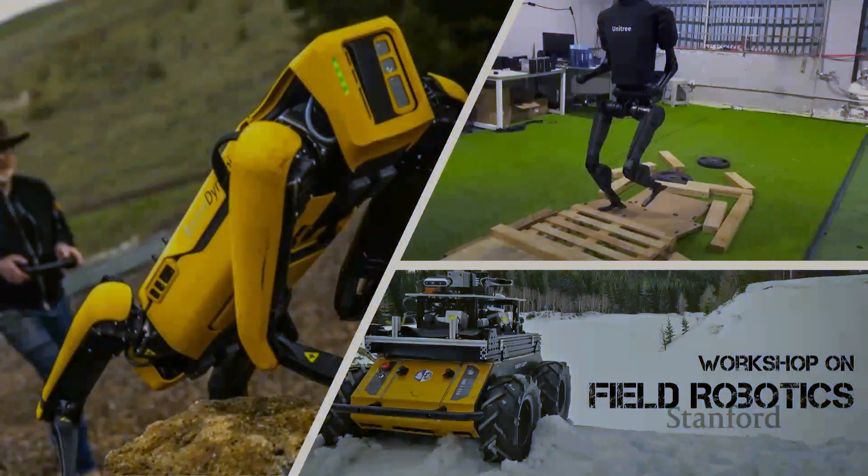But the journey for me since then has been, how do you bring this adaptability into robots so that they can work in real world environments and deal with real challenges and do useful things? And overall, I'm not the only one. Of course, there's a pretty large community that works on field robots. And when you think of field robots, you kind of think of these types of things, right? Legged robots, bipedal robots, driving robots. I've been a part of several workshops.

And I think it's pretty clear that field robots hold the key to a lot of problems facing sustainability, right? So obviously electric rideshare, that's pretty much on the way here. Climate smart construction, sustainable agriculture, which I'll talk about, and I'll talk a little bit about sustainable solar.

But I purposefully picked these pictures because you see there's like these humanoid robots trying to do things, right? So just as silly as it is to have a humanoid drive a car for your autonomous driving, I want to make the point that the robots that actually end up being successful and actually end up working may not look anything like the robots that most people think of, and really have to be a product or co-design of the hardware and the software together.

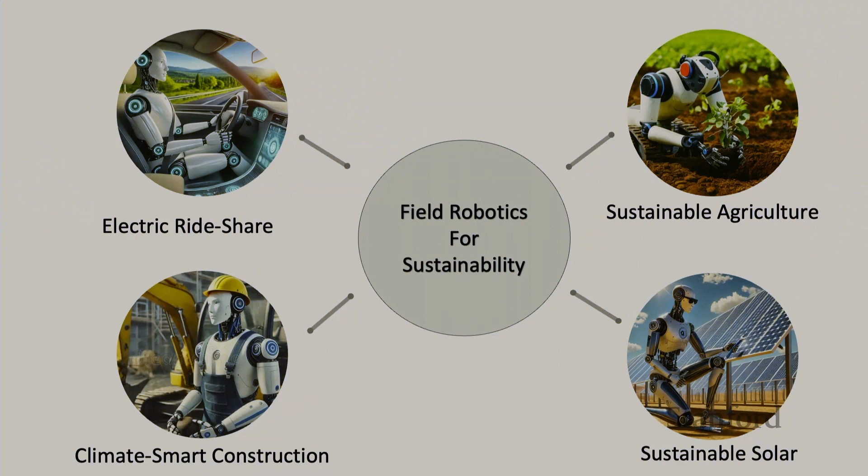A lot of this was actually inspired, when I was growing up as an academic or as a graduate student, by the work of Andrew Ng and the first aircraft that did the flips, and of course Sebastian, of whom I heard a lot about at MIT, because the team that competed against Stanford was MIT, which didn't win, right? But a lot of the effort that these early robotics engineers put in was towards co-designing hardware and software, so that we have reliable robots.

So here are my main points that I'm going to make through this talk. So where are the field robots? They're stuck in labs. How do we get them out of the labs? Well, we need to think about scaling up. We need to think about continuous learning and adaptation on the fly. We need to think about performance in the open world, not in structured environments, and common sense.

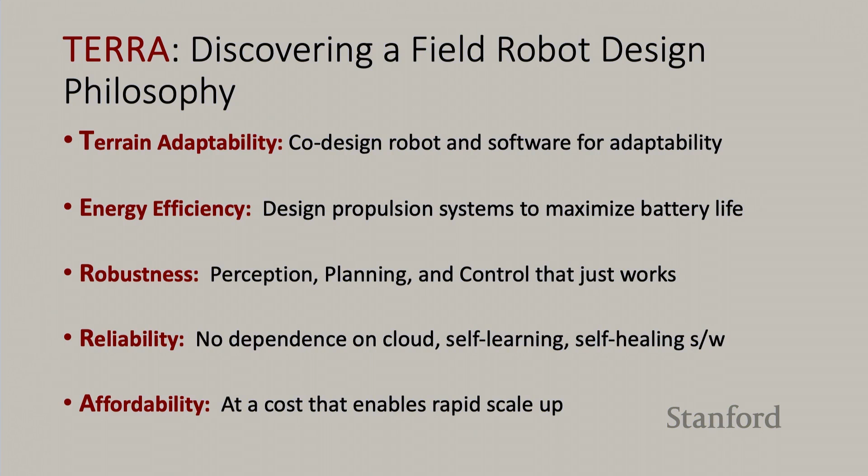So towards that, the journey to date has been discovering a philosophy, and I called this philosophy the Terra philosophy. The T stands for terrain adaptability or task adaptability, E for energy efficiency, R for robustness, reliability, and affordability. So what I'm going to do now is show you 4 or 5 examples of robots that we have created while we were discovering this philosophy, and describe to you the journey and the impacts that these robots are right now causing. So first we'll start with agriculture.

So agriculture, as you know, California is huge in agriculture, right? One of the largest agriculture producing states. The agriculture here is quite different than that in the Midwest. In the Midwest, we do a lot of corn and soybean agriculture. And the key tenet of the agricultural robotics work that I'm doing is that there's this labor bottleneck that's causing unsustainable practices to be used. And the idea is that robotics and AI will help alleviate those labor bottlenecks.

So this is an interesting paper by Foley that appeared in Science. And it talks about what is the cost of producing food today compared to the amount of food that we're growing. And you might have heard about how we're going to be 10 billion people in the next few years, and that's going to be a big problem. And in all honesty, we need to increase the amount of food that we're growing, but we also need to bring under control the cost of that.

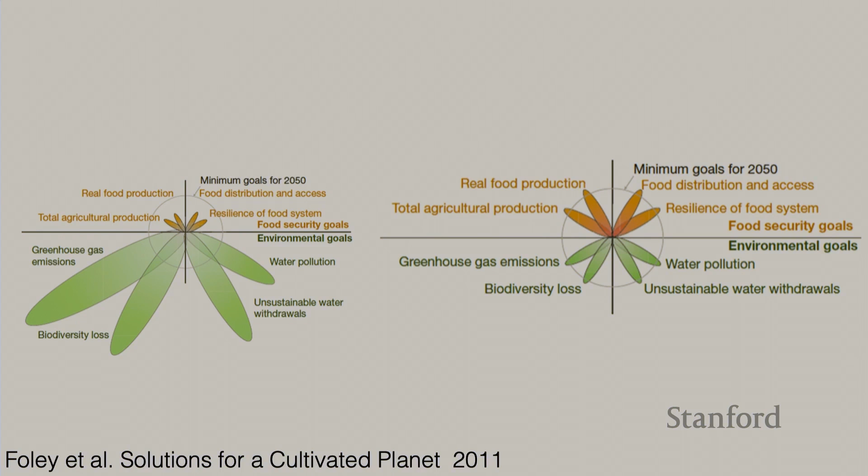And I'm talking about the environmental cost, right? So greenhouse gas emission, biodiversity loss, water pollution, water withdrawals. So this is called sustainable intensification. So how do we do this? One of the most unsustainable crops that's out there is corn. There's 200 million acres of it in all of the I states, and it's what we call a large-scale monoculture. So you take large swaths of land, you clear it of everything else, and just plant corn. And because you're moving the prairie away from its natural state of equilibrium, you have to put a lot of chemicals in to make that work, right?

So herbicides, fungicides, fertilizers. But the problem is that this system of large-scale monocultures is not only unsustainable, but it's failing. You might have heard of pesticide in your waters, right? But there's also a huge challenge with the herbicides that folks are using. The weeds are becoming herbicide resistant. And this is not anything mythical. You actually see it now.

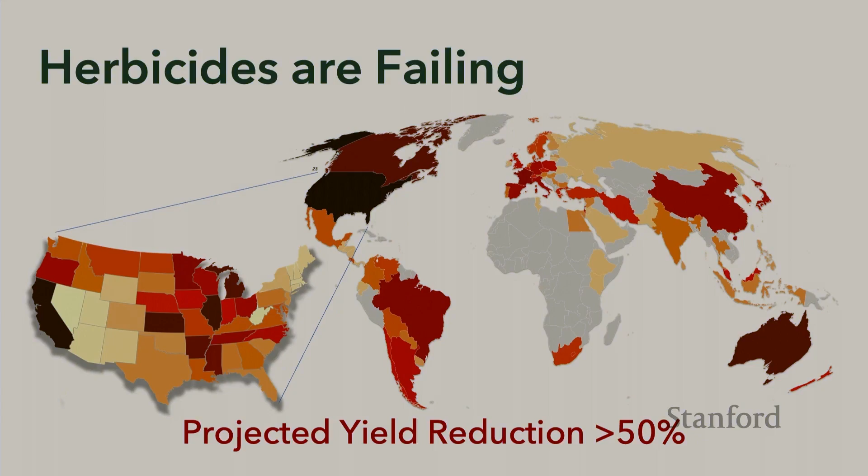If you drove down in Champaign a few years ago, we didn't have a lot of weeds visible. But now, close to the end of the season, you see these weeds popping up out of this soybean crop, to a level where sometimes it's impossible to harvest, right? So this, according to some people, is a real doomsday kind of situation. Then there's the large equipment that we use to enable these large farms. A normal farmer in the Midwest will have 2,500 acres of land under control.

It is not contiguous land. It is parcels of land that are distributed all over the place. And the only way they get anything done is by using these very large machines, right? But these machines cause soil compaction, they cause erosion, they cause nutrient loss.

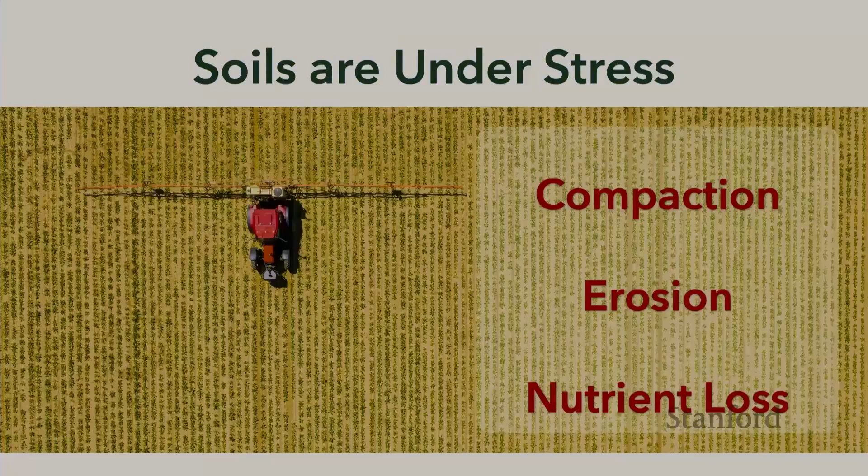And on the other side of the world, if you look at another very unsustainable crop, which I'll talk a little bit about, which is palm oil, crops like that cause significant deforestation and loss of biodiversity. And even with all of this, just with corn and soybean, the trends are that our yields are not actually matching the demand.

So one way to address this challenge is by adding new options for farmers, right? So today farmers can either use manual labor or use large tractors. Manual labor is great for small-scale farming. Large tractors are great for very large-scale monocultures. There's really nothing in between.

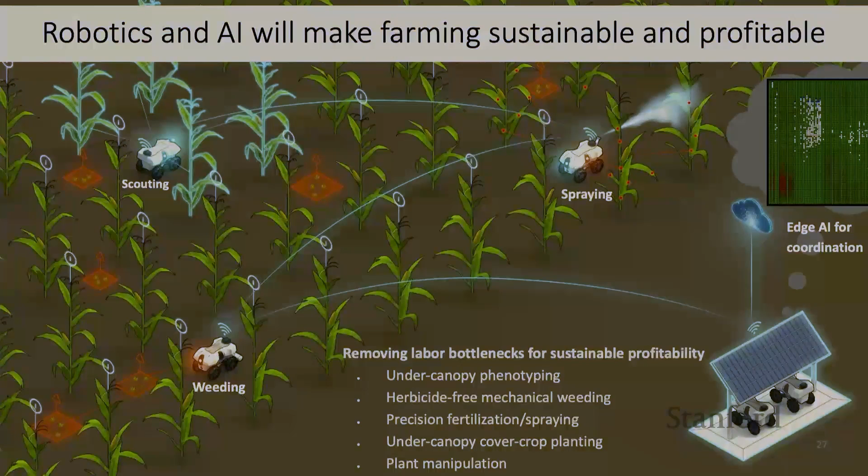So one of the ideas that we started thinking about 6-7 years ago was, can we use a number of small robots that can work together and do things that are today not possible due to unavailability of labor, such as phenotyping, mechanical weeding, cover cropping. And I'll talk a little bit about some of these things.

And this idea of robots in agriculture is not very new, right? I mean, people have been talking about this for at least 10-15 years, but it's very challenging. And even though there's a number of companies out there that are trying to do it, the problems are really hard because the scales are very large, the field is very messy, and whatever data there is not really representative of what actually happens in the environment.

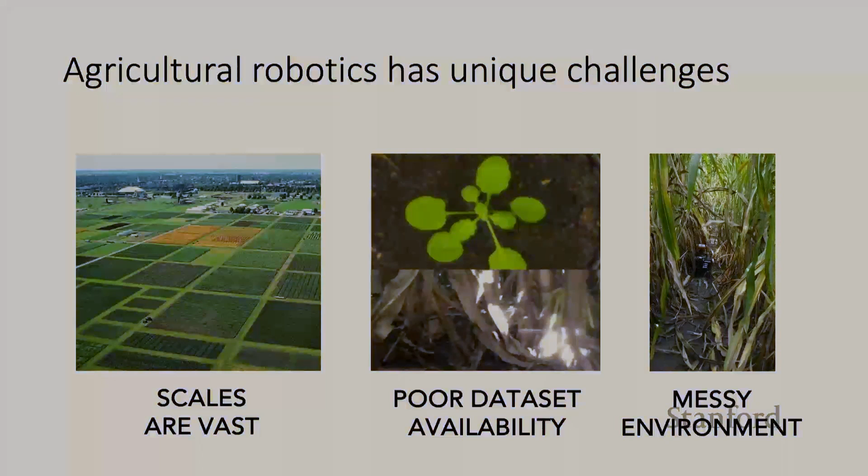So where are the ag robots? So even though you see a number of these companies coming up and robots coming up, we haven't really seen a large-scale adoption. And if you really kind of peel the onion, and there's a lot of interesting work on this, everything boils down to cost, right?

So we cannot use the same ways or same methods that we're using for autonomous driving, in which we're using a lot of sensors and over sensing the problem, mapping everything out. We have to find ways in which we can reduce the cost while also making the robots work.

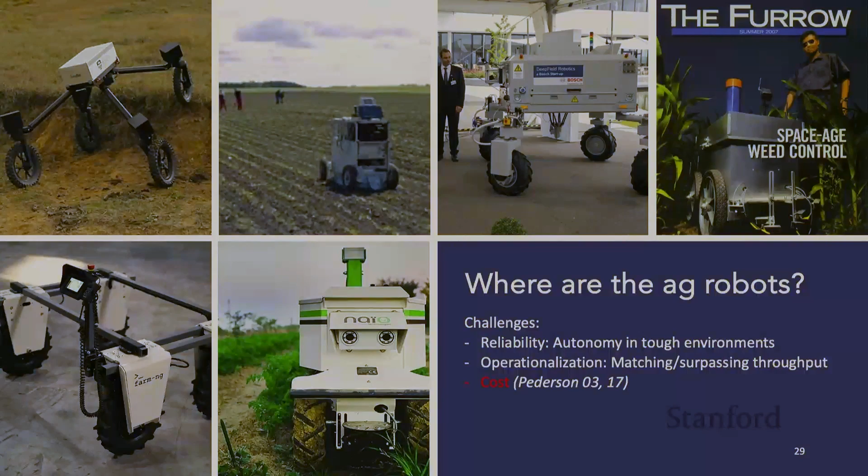So now I'll give you the first example of how we've been trying to do that. And this robot is called TerraSentia. And we have made about 80 of these, and I think you were involved in this robot. And these are actually deployed in the field.

So corn, right, which is everywhere in the Midwest, turns out it's actually not a natural crop, in the sense that if you go back through the history of agriculture, you won't find a natural ancestor of corn. What you find is this thing called teosinte, which looks nothing like corn. But the Native American people in South America selectively bred teosinte with other crops to create corn. And there's a very interesting article on this in the New York Times.

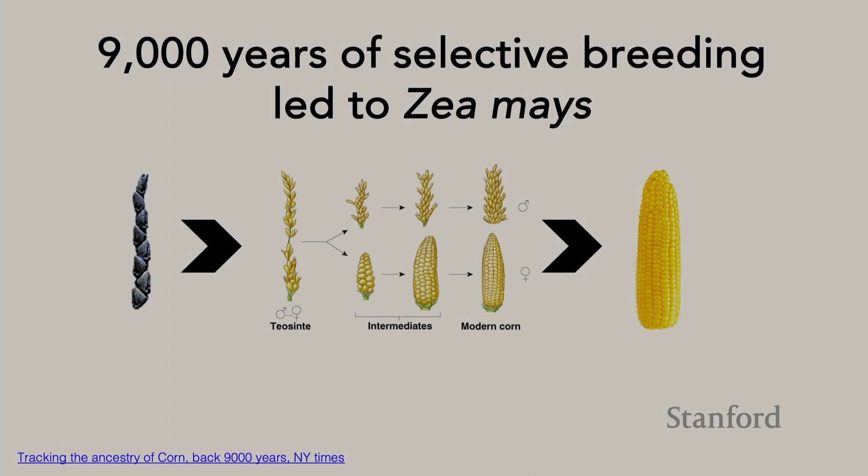And it turns out that only about 9,000 years ago, the latest varieties of corn were created. And right now, even under the North Pole, the modern varieties of corn are stored. So in case we get hit by a meteorite, we don't have to go 9,000 years back, right? But of course, that pace of breeding cannot keep up with what's happening today.

So the only way you can make a single farmer deal with 2,500 acres is to create seeds that are super adapted to the environment, right? So in India, this is a joke that I used to make. Like in India, if a bug eats a plant, right, the plant dies. But in the Midwest, if a bug tries to eat a properly bred corn plant, the bug will die, right? So that's the idea. But the pace is just not matching up. So in order to feed the world, we really need to accelerate this pace.

So to do this, modern crop scientists use a technique called genome-wide association, with other techniques. And what happens there is that you sequence all the genomes, and you measure the environment, and you're looking for the patterns in the genomics that represent specific phenotypes.

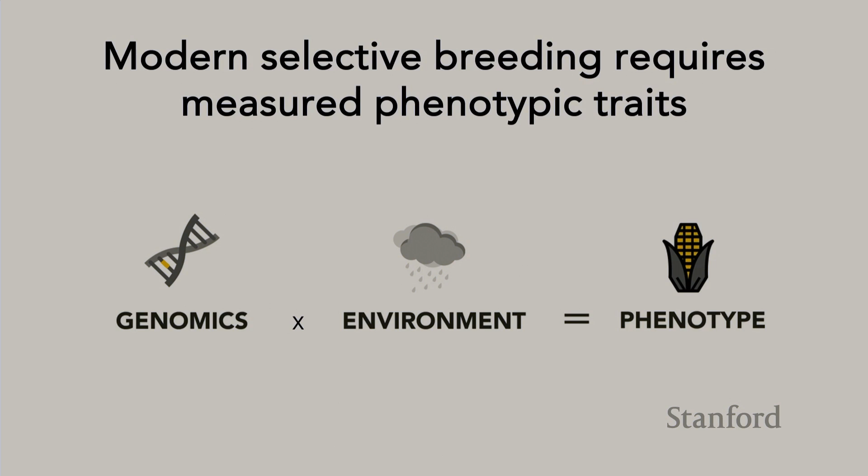For example, disease resistance, yield, right? And once you find them, then your job is to use techniques like CRISPR to create the crop that accelerates those traits. But we don't have a model. We don't have a simulation of plants. So the only way you can do that is by running very large-scale trials. So what these companies do is they run hundreds of thousands of acres of trials.

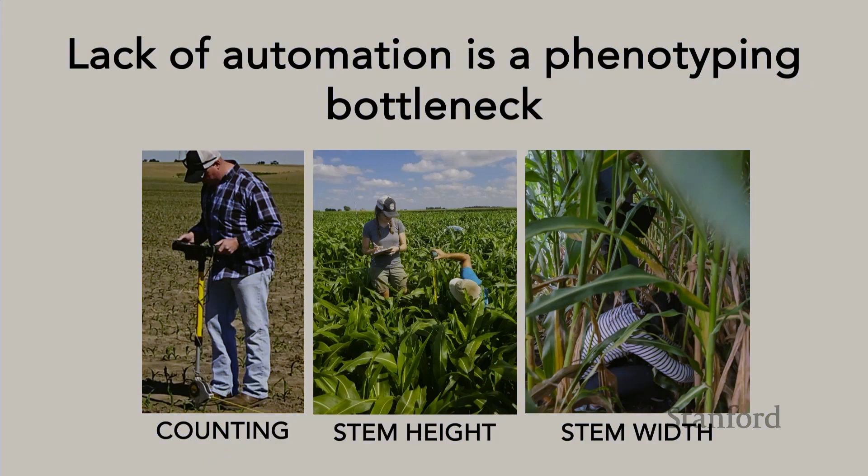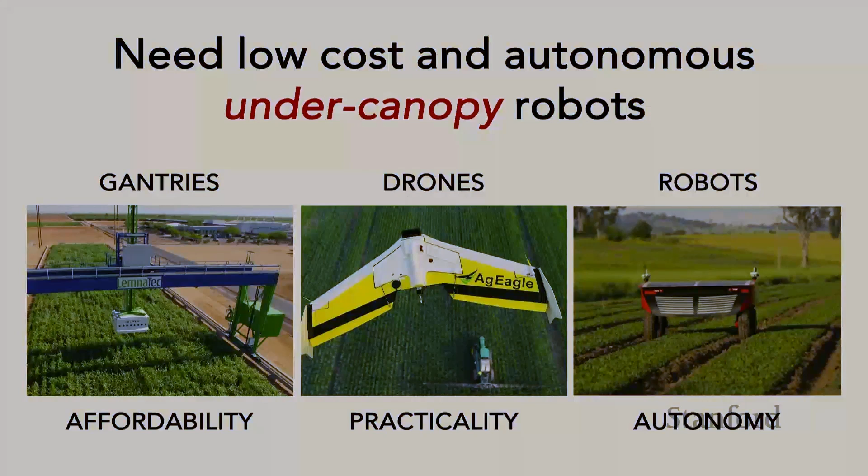And today, all of those measurements are manual. And this results in what we call the phenotyping bottleneck, right? So these folks are counting, measuring stem height, stem width. These are really difficult things to measure and take forever. So you can automate that using gantries or drones, but neither of those see under the canopy, which is where robots come in, but most robots are over the canopy.

So in 2017, we introduced this 3D printed robot called TerraSentia, which won the Best Paper Award at the Robotics Science and Systems conference. And the idea was really this small robot that can go under the canopy and use machine learning techniques to basically do simple phenotyping. In this case, it was counting.

And the genesis of that robot was that before we started working on it, these were the kinds of robots that were out there. So this is a robot that was made before I came to UIUC. It's a tracked robot, and people are using all these kind of best practices. So people thought, well, you have to make a tracked robot because it's the field. But you see here, this robot kind of drags that plant down.

You have to put a mast on it because you want to see down, and you have to put the most expensive sensor that you can find on it. But the reality was that while that was an expensive and interesting robot, it actually didn't do the job that it was supposed to do. So, as we learned from the world of drones, miniaturizing a helicopter was not the solution. We had to come up with a drone, which is not something that a human would fly in, right? Because it's impossible to fly until you put an IMU on it.

So a student of mine then came up with this idea: why are we trying to do all of this? Why don't we just take our drone and make it run on the ground? Well, obviously you cannot fly it through there because the endurance just wouldn't be there. So we came up with this 3D printed robot, and it was just a very basic idea of taking those motors and flipping them down, each wheel having its own motor, with no other moving part, and then putting a camera on there to see how well that works.

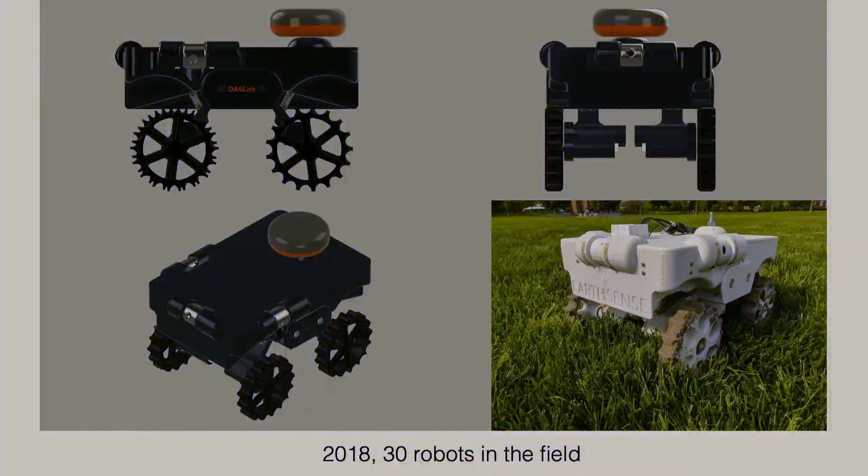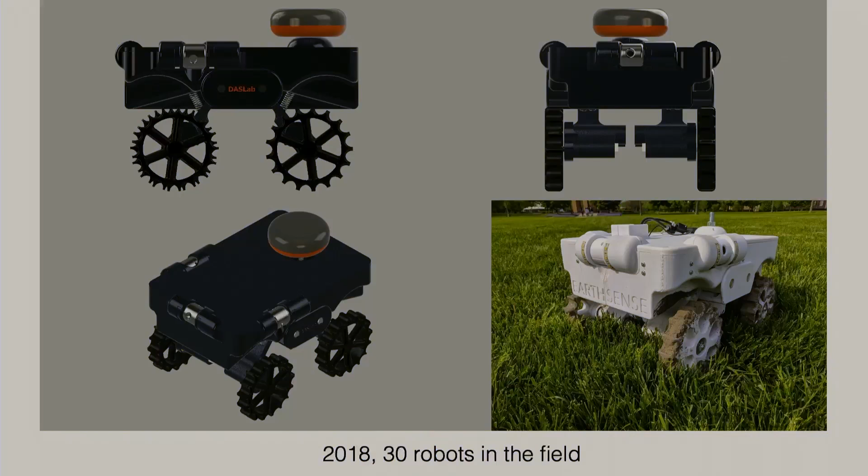Who knows Steve Blank? Anyone know Steve Blank? Lean startup, right? Stanford person who created this whole philosophy of lean startup. So we had an NSF I-Corps project, and we went and engaged with customers. We made 30 of these 3D printed robots and gave them to customers. And we said, okay, go use them in the field, we'll see how well that works. And literally some of them melted in the field, because field environments are very difficult.

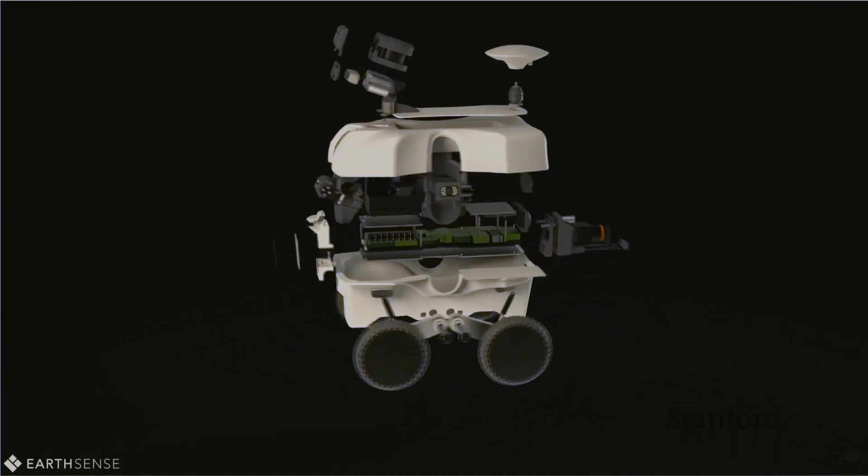So at around the same time, this company EarthSense that I co-founded took over that project and became a technology partner in the ARPA-E TERRA-MEPP project, and created this robot called TerraSentia, in which Rajan was a part of creating the drivetrain, right? So this was a very different field robot compared to the ones that were out there. It was made with hub motors, so each wheel was itself a motor. There were no connections other than that, so you directly connected your arm to the wheels.

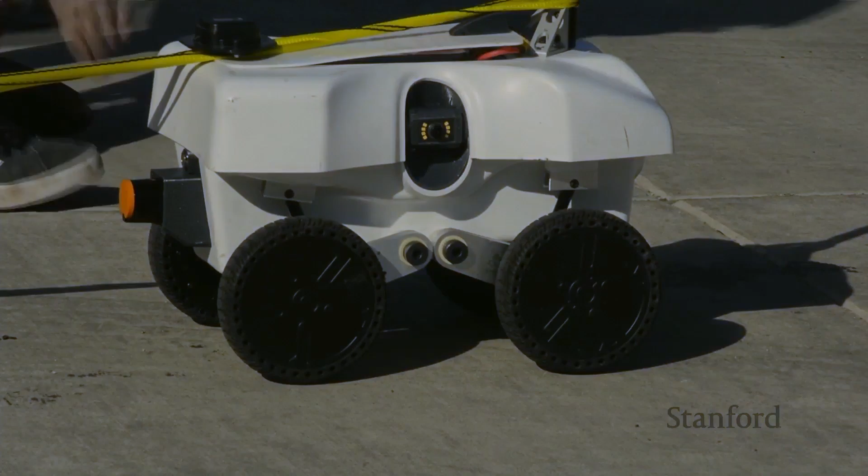Because they're hub motors, they're contactless, brushless hub motors. They can go through water, they can go through snow, they can go through all kinds of different terrain, and the robot was extremely tough, as is shown in this example. So this was, I think, the 2020 or 2021 version of that robot.

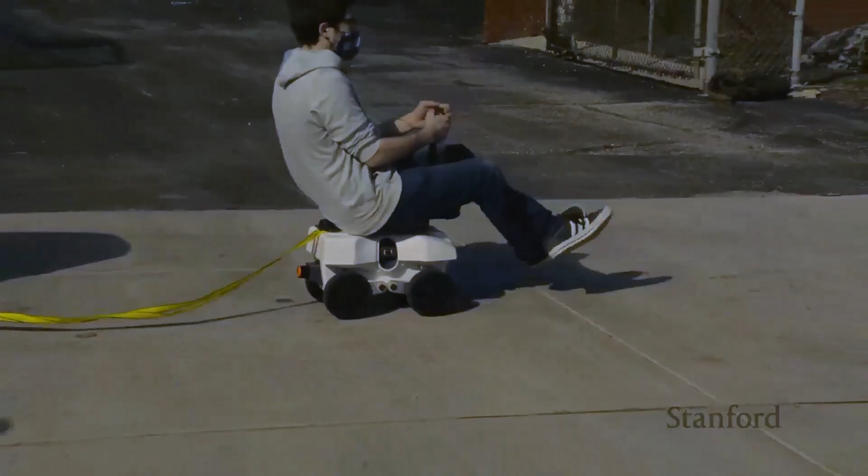We iterated across 3 years, and every year we tried to improve the robot, finally bringing it to this level of maturity. So this is one of our engineers just loading up the robot with some weight. The robot itself weighs no more than 20 kilos, right? Then he's sitting on it, and then the robot pulls this 400 series tractor, right?

So I think it was very interesting, getting into the design space there and figuring out how we can use electric propulsion to make sure that we pack a lot of power in very tiny machines. So that's great. That was one part. The other part was trying to get these robots to be autonomous. The standard way of doing that is with global positioning system, GPS, right? And it works great on John Deere AutoTrac and Trimble's GPS systems because they have clear view of the sky.

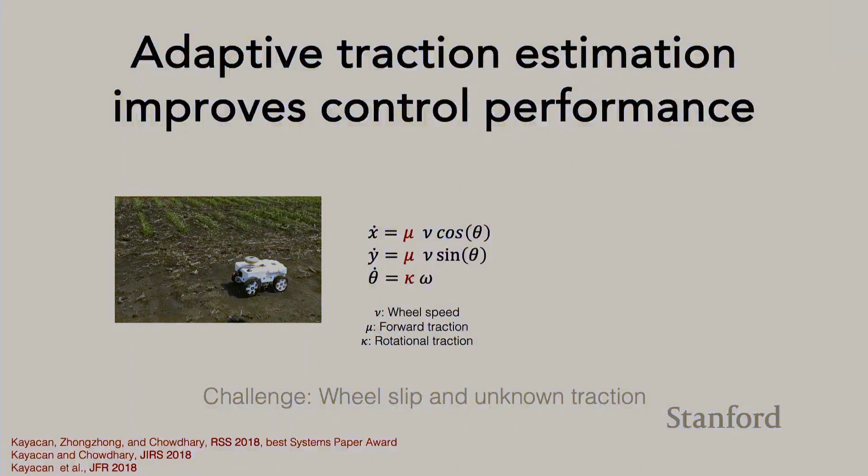But once you start going under the canopy, and we did a lot of work on this, part of a number of papers that one of my students wrote, who's now at University of Oklahoma as a professor, was figuring out these traction coefficients in real time and using them to improve the control, using techniques like model predictive control and receding horizon estimators to really improve the accuracy of GPS. But the problem is, once you go under the plant canopy, whereas with a real-time kinematic RTK GPS you're supposed to get under 2 centimeters accuracy, the accuracy drops to 40 centimeters, right? Because the signals bounce off of the plants.

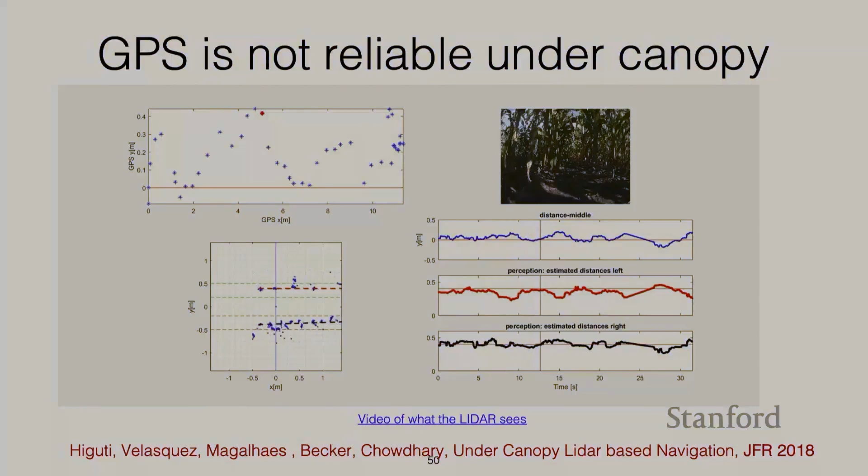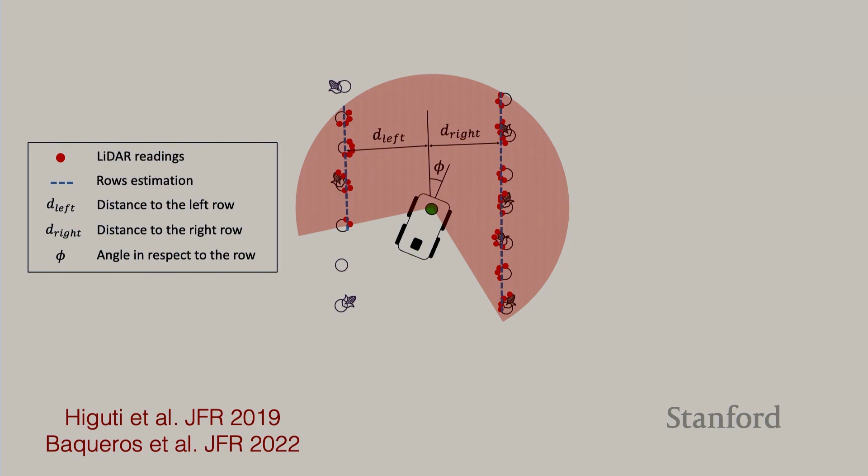So we started in about 2019 working on how do we solve this problem using exteroception, right? And we posed this problem as a row following behavior problem. So using a single sensor, can we figure out the distance to the row and the angle to the row? And this is, in a setting like here, a LiDAR point cloud. So the LiDAR is here. Again, we're trying to reduce the cost of the LiDAR, so it's a $1,000 LiDAR. And these are all the plants here. So you see it's a completely messy point cloud. Whereas if you try to drive here, you'll get a very nice line on which you can fit a line.

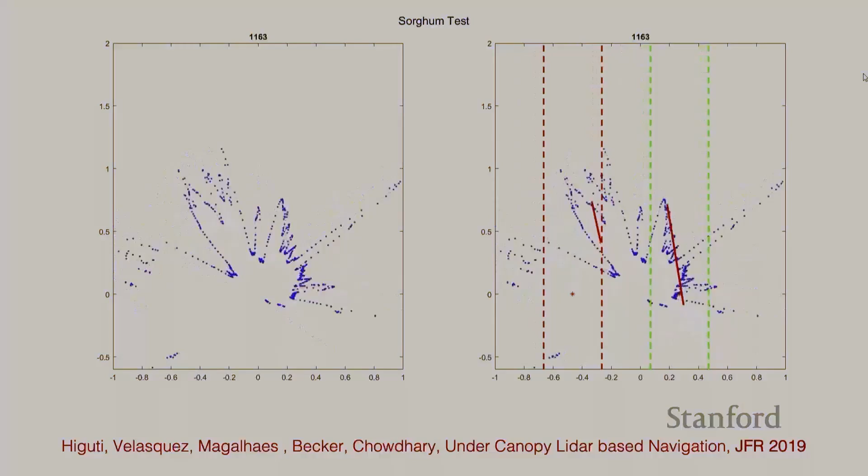So fitting the lines on that LiDAR point cloud was one of the first key challenges that we had to solve. That's explained in this paper here, and we came up with a method that was basically an accelerated form of line fitting in the presence of outliers, and then we put it onto the robots. So this is an example of me giving that robot a hard time as it's driving down the field with this algorithm on it.

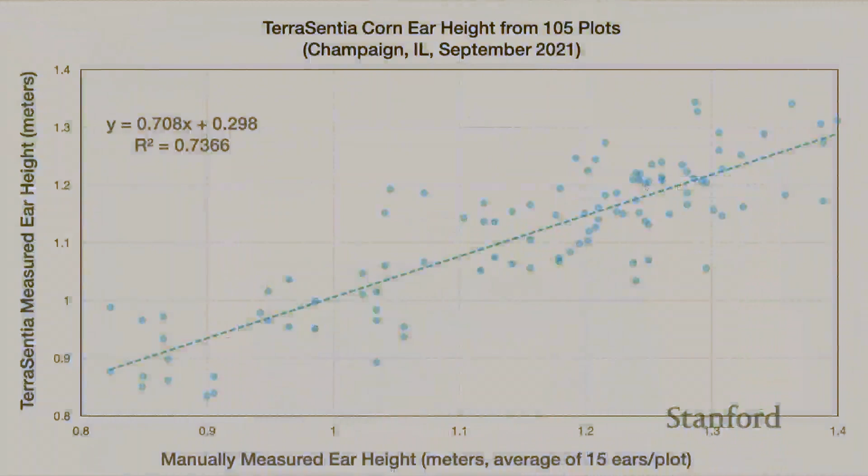So taking that same idea, this is just measuring, and it is limited to crop breeding. We wanted to bring that idea to farmers. So in the Midwest, the agriculture is very seasonal, right? Right now, when I left Chicago, the temperature was 18 degrees Fahrenheit, right? So it's freezing, and there's basically nothing that lives. So from basically November all the way into March, we leave these 200 million acres entirely bare, right?

And then before planting happens in around June or late May, weeds come up and the soil degenerates and all kinds of things happen, right? But there's a way, and this soil could be doing useful things, right? So you can grow cover crops on it, and cover crops can do a number of things. They can sequester carbon, they can fix nitrogen, they can hold nitrogen that's excess, and they can break up compaction, right? So different types of cover crops can do different things.

Now there's also cover crops that can be used for harvesting, like they can create biomass that can be used to create sustainable aviation fuel, for example. But most farmers are not able to do it. So this is around Thanksgiving. If you try to land in Champaign, you see what I call the corn and soybean desert, right? It's just like acres and acres of bare land.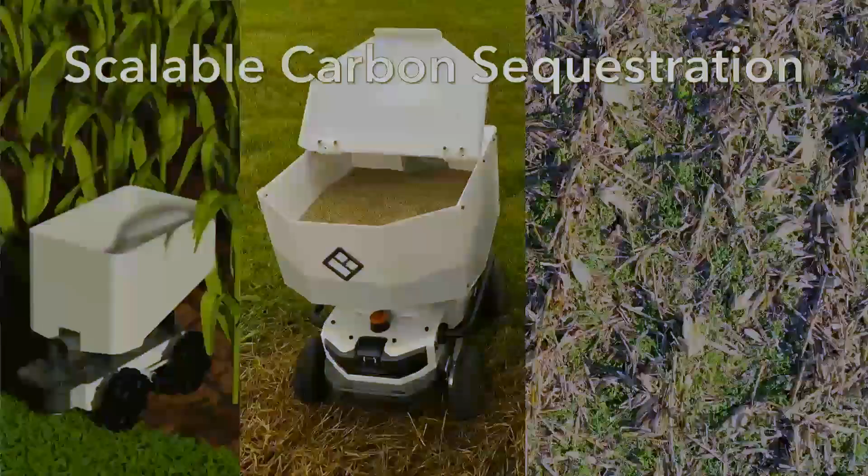And the problem is that they harvest somewhere around September. And if they try to get cover crops planted after that, the sunlight days are really not there, right? So by November, it starts to get cold, and they can't really do this. So we had this idea, well, what if we created a robot that could go through the canopy and broadcast seeds? So using the same kind of technology that we were using, but broadcast seeds so we can have cover crop planting done as early as August in standing corn.

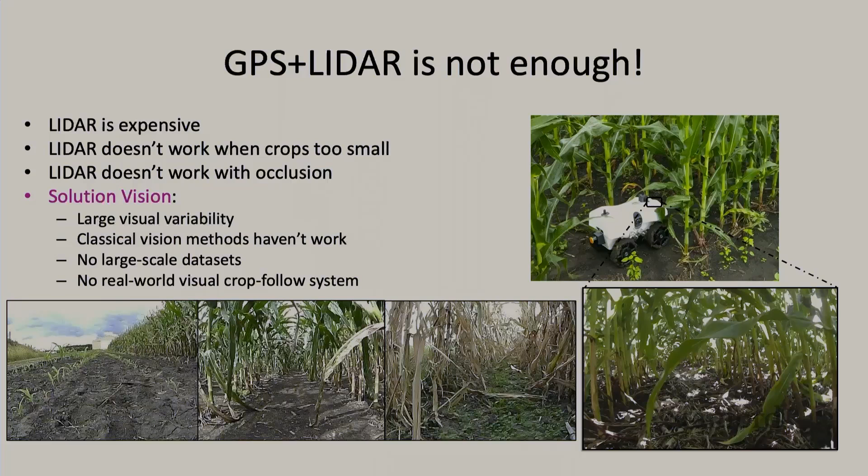And with a lot of economic analysis, we can show that it can be done at a much lower cost. But the problem is you need to bring the cost of the robot further down, right? And you need to make it more reliable. So LiDAR-based autonomy is just not enough. So we had to change the sensors and think about using cameras. So these cameras cost $30, whereas the LiDARs cost like about $1,000. But that's a very challenging problem, right? Because fields are really messy when you try to do it with monocular vision.

So we worked together to create a method called CropFollow, and Arun, who is about to graduate, worked on this. And here the idea was, we thought about many different ways of doing it. One way you could do it is using techniques like reinforcement learning, right? Where you basically learn everything from scratch and try to see how that whole setup works. But the problem with that is it's really difficult to debug. And then in this high mix, low volume manufacturing setup, these robots are individually very different. And because of that, it becomes very, very hard to find where the issues are. And of course, we had a fully working system also.

So what we did is that we just swapped this distance and angle estimation with vision. And we said, can we find distance to the row and angle to the row with a single vision? So basically, you have a single camera, a monocular camera, an image from the camera goes in, it goes through a neural network, and it predicts the distance to the row and the angle with respect to the row. And so we started doing this in about 2019.

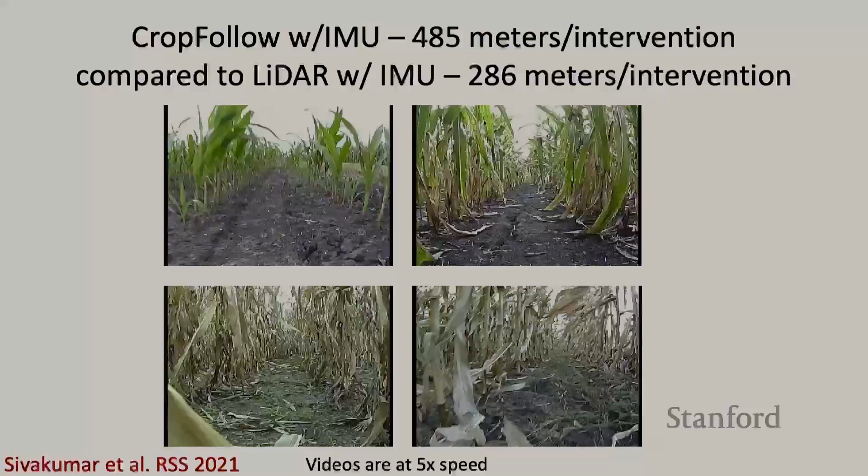And back then we did it with labeling, like heavily supervised learning. So we labeled about 26,000 images, using all kinds of techniques where you can correct the image when you don't see the horizon. We use the plant as the way of seeing the horizon, measure the roll and pitch, and then get basically a good estimate of where the crossing points are. And then we used that to train this model, and then we started testing it in the real world, and it worked really well.

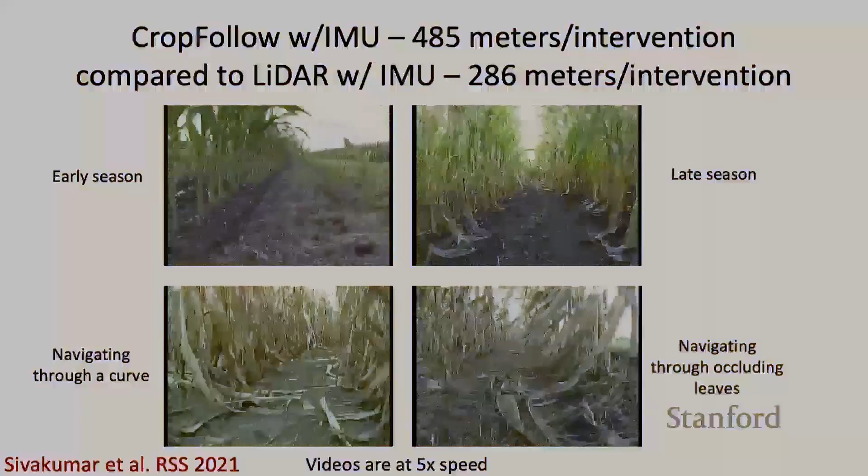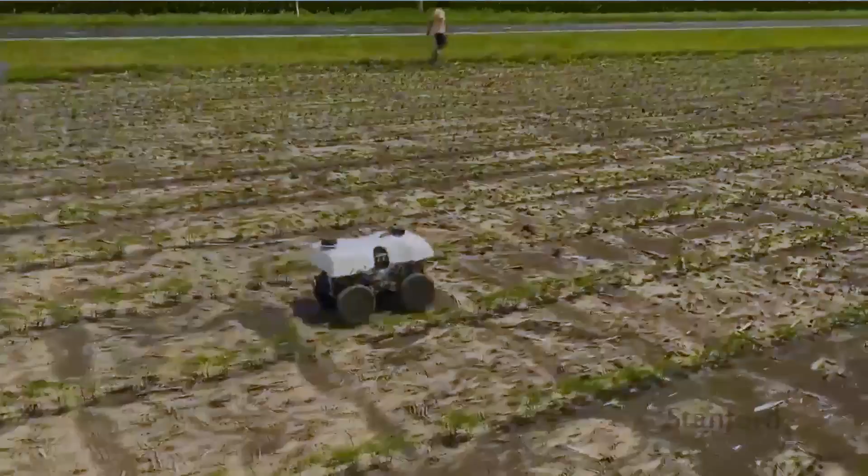So these are some examples of this vision-based autonomy. You can see the terrain is really challenging, and the robot is able to tolerate early season, late season, a small curve, and significant occlusions. And so we deployed this, and this is now Arun, and you can tell that he's ready to graduate because he's starting to kick his robot now. He's a lot gentler, although there's a number of other things that were also changed.

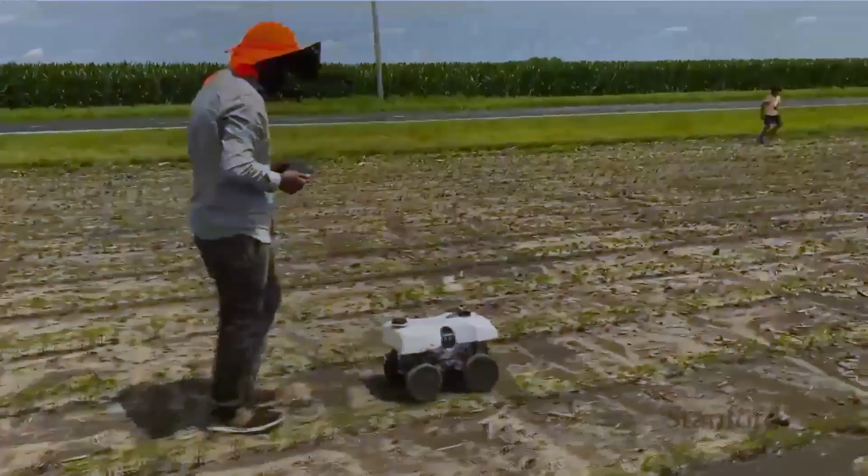As you can see, the robot's also controlling its speed now. So there's a little planning module on there which is trying to control the speed as well as the angle of the robot to make sure that it's going on its path. And I think this is like, can you see the plants? This is early season soybean. So obviously the LiDAR isn't working because the plants are not as tall as the LiDAR. And then after a while, the robot will enter early season corn.

The same, just going straight. This is at the Farm of the Future at Illinois. So anyway, let me see. Just push it forward a bit. Yeah, so it just seamlessly transitions into early season corn and continues to go.

So this was great, and then we took this and several other methods and tried to do a large scale experiment with it, and then we started finding out that even though everything worked great in the paper, and we were able to get very large sets of validations, and it was an RSS paper, 25 kilometers I think, when we started to deploy it beyond that, we started to see a lot of issues. So one of the issues was that the environment changes. There's really no uncertainty prediction.

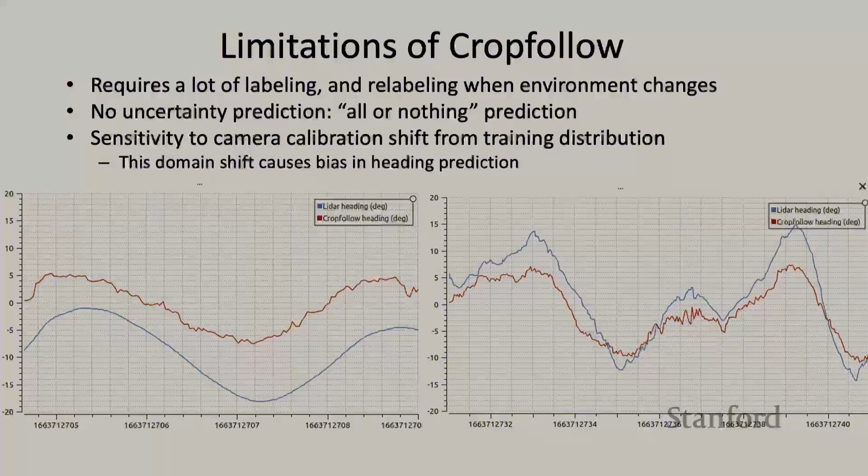So because the environment changes, we basically end up with a domain shift. And because the cameras on these robots are differently calibrated and installed with slight defects, what works on one robot doesn't work on the other. There's like little biases that creep up.

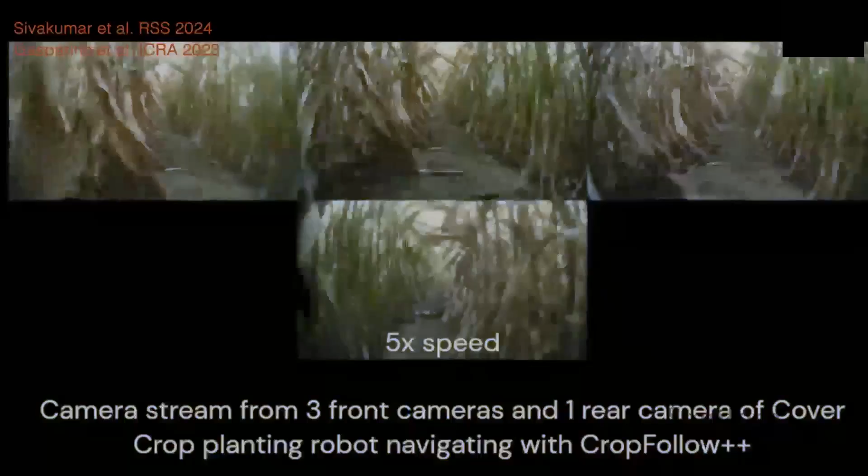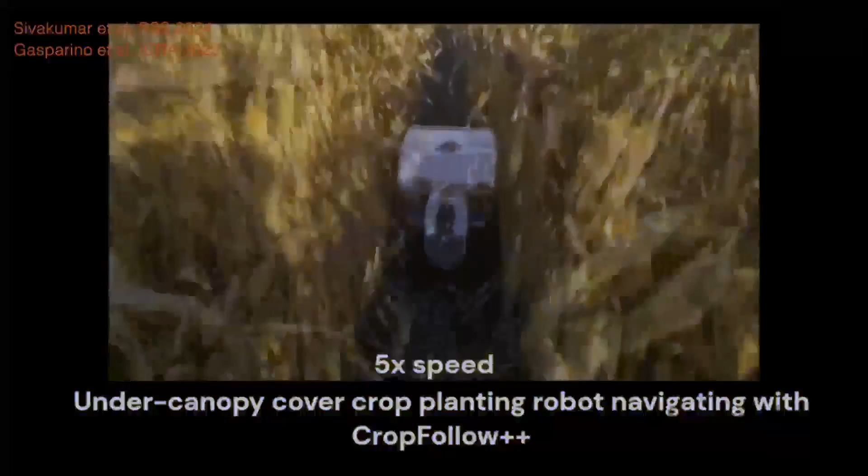So in this year, 2024, we published another paper called CropFollow++, in which now instead of doing the full angle to row, we're basically creating a confidence estimate of where the horizons are. So 3 points, right? The end of the horizon point, the 2 points here at the side, and then combine that with AI to detect failures and recover from failures when they happen. So this is an example of that happening.

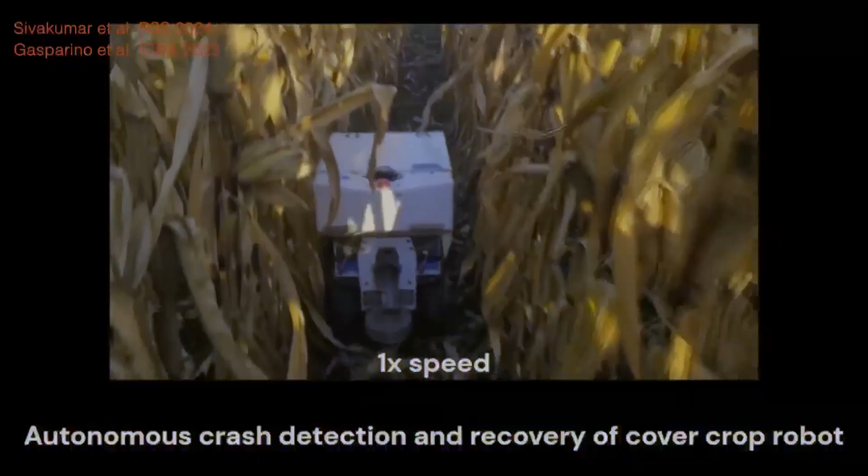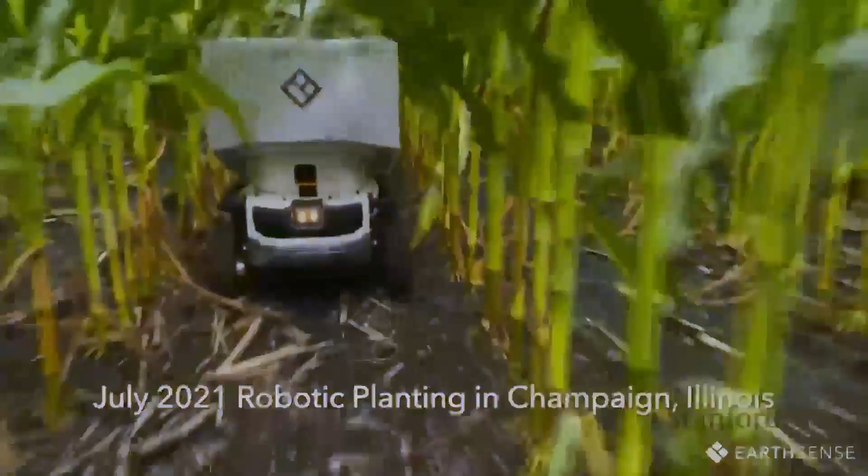So there were two sets of papers. One was the 2024 RSS, and the other was the ICRA 2023 paper, which kind of put that together. And that is working really well now, and that's what creates this kind of an idea. So you have a robot which can go through standing rows of corn and distribute seeds of cover crop. And there's new types of distribution methods that are now coming out.

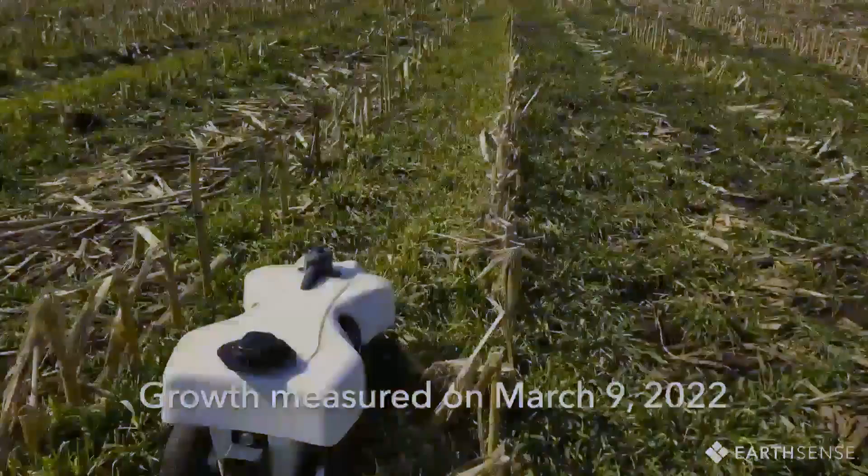Each robot can cover 9 rows. So 4 rows on one side and 4 rows on the other side and the row that it's in. So if you have 10 robots, you can cover 90 rows at the same time, right? So driving at about a meter per second, these robots can get a whole field the size of 100 acres planted in less than 5 hours. So that starts to now compete.

And by the time you harvest, there's already a standing cover crop there. So this is a very iconic picture, right? The harvester has just gone through and the cover crop has already emerged. At the Farm of the Future, we did an experiment comparing robots versus tractors. And you can see by spring, the cover crop that's planted with robots is really robust and healthy, and we get really nice benefits from these types of crops.

We have a large grant now to try and scale this up with a target of many thousands of acres next year, and trying to really bring this technology to fruition.

Now I'll talk about another example of the Terra philosophy with a robot called TerraMax. And this is now all the way on the other side of the world in Malaysia, in palm oil plantations. So palm oil is one of the most consumed oils. Apparently 50% of supermarket products have palm oil, less so nowadays because of all kinds of issues in the US. But if you go to Asia, even Cadbury's chocolate has palm oil. And in my opinion, it tastes better.

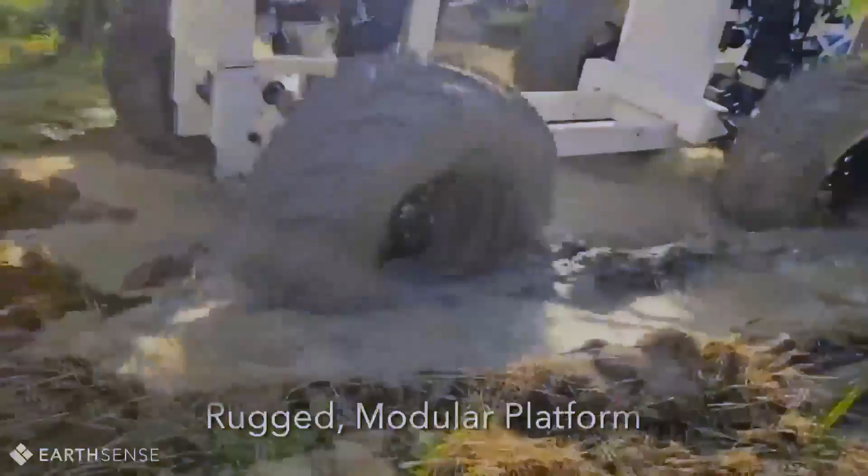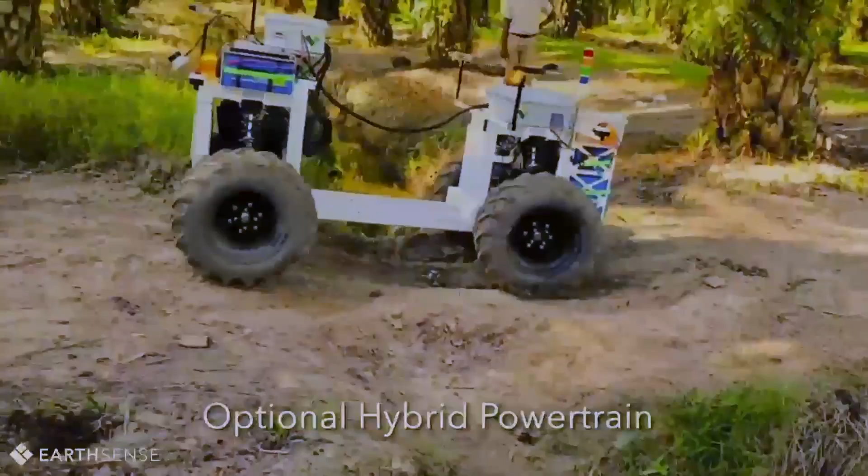Now, TerraMax is a completely different robot. It's a 500 kilo robot that's much larger than our other robots. It still uses the same types of techniques, so individual wheel motors, no variable transmission shaft, so there's no transmission. So the two wheels can operate completely independent of each other, right? They each have their own suspension. It can tackle really challenging terrain,

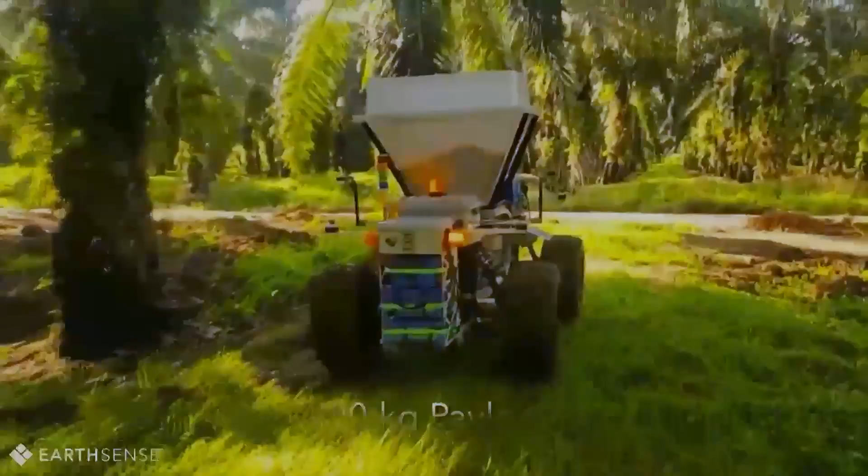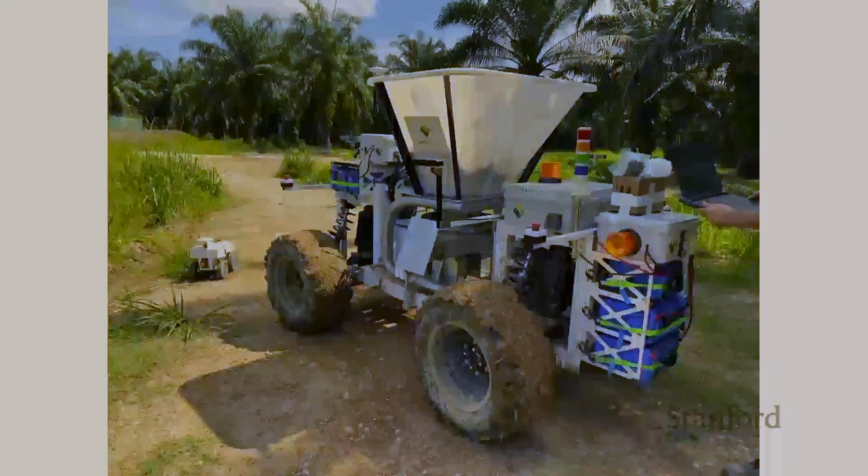and the middle part is open for putting different types of payloads, right? So in this case, it's a fertilizer bin, and then you'll see that it does some fertilizer spreading right here. And it's a fully electric, battery-operated robot, and we're learning a lot about optimizing the motors to do this. And just as a comparison, that's TerraSentia, and that's TerraMax, right? It's a totally different robot.

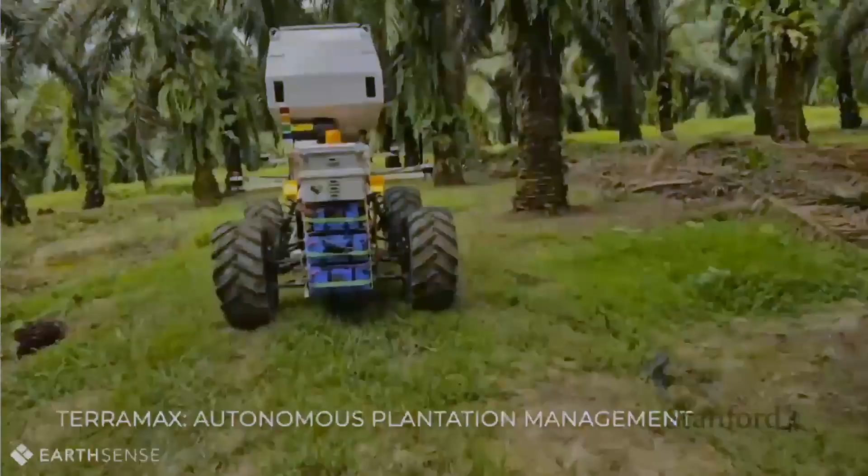So in September, I was in Malaysia, and we managed to do 102 hectares in 7 days. It was a challenge that was set forth by the industry to see how scalable this technology is. And it was quite exciting. And here's just some snippets. And of course, from a research perspective, these robots use some of the techniques that I talked about, but of course, way more than that, right?

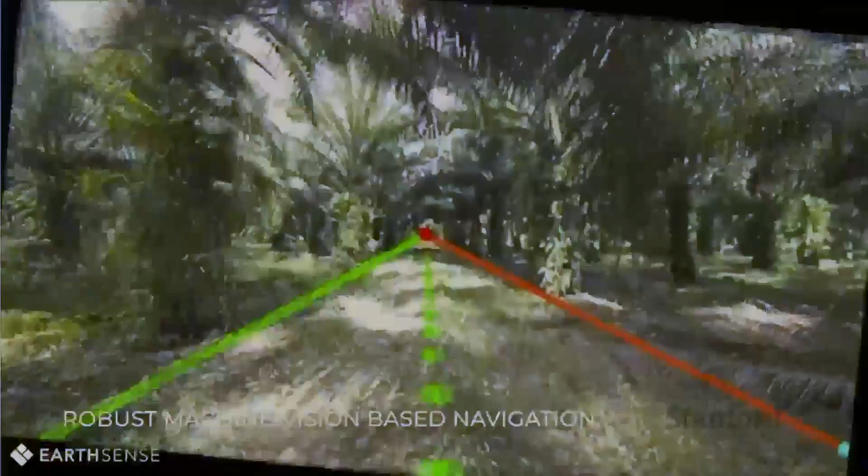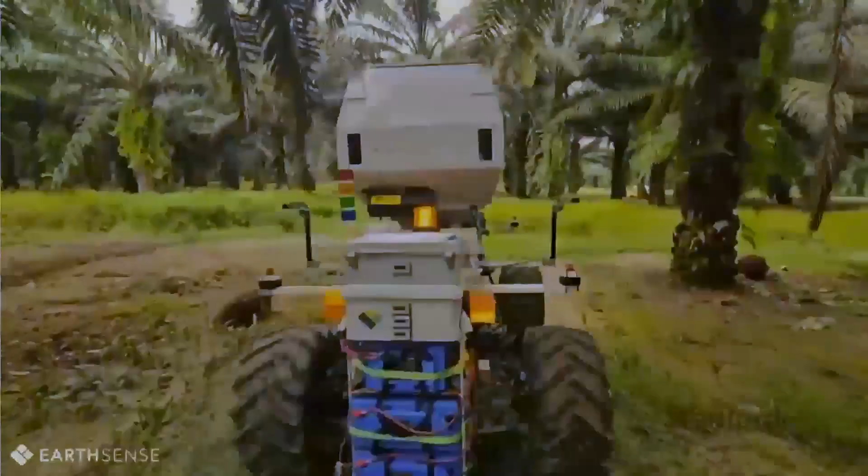So they ended up using a technique in which this type of row following is combined with large-scale semantic segmentation, which creates a pretty good understanding for the robot of where it is. That's combined with the GPS data that it's getting, and you saw in that video that it's detecting individual trees, distance to the trees, and then executing maneuvers. And it's quite challenging because there's a ditch right here, there's a ditch on that other side, there's a ditch here. But it seems it's been doing pretty well.

We also have remote monitoring systems in place so that we can keep an eye on what's going on and then get this robot to drive autonomously. And everything here I'm showing you is autonomous, right? So that is the benefit of not having a transmission. The wheels are totally imbalanced, but the robot is able to go through some really tough terrain. So that's my engineer. She's just delighted that it tackled that. And it rains every day in Malaysia, so you can't avoid muddy puddles. But of course, even with that, the robots fall down.

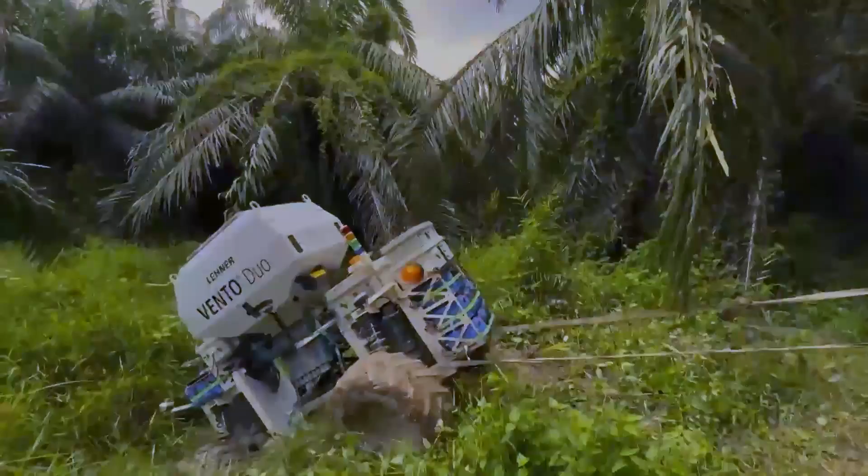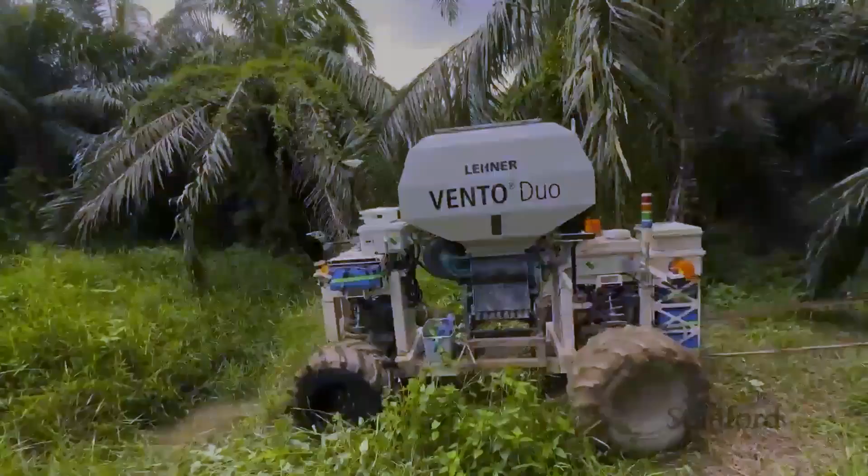And one of the big lessons that we've learned now is that you really cannot try to make the whole system fully autonomous. You really have to think about increasing throughput. So here the robot fell into the ditch. It was pulled out by the tractor and immediately resumed work, right? It was not a showstopper by any means. But essentially, one of the big philosophies coming out of it, after completing the 100 hectares, is that you really have to find ways in which humans and robots work together, as opposed to imagining that robots will completely replace humans, because we're just not there yet.

Because let's say you put the most expensive sensor that you can find, right? You still need somebody to clean it eventually, unless you put a cleaning system. Then if you put a cleaning system, then the cleaning system breaks. So I think we have to start thinking about robotics as an assistive technology.

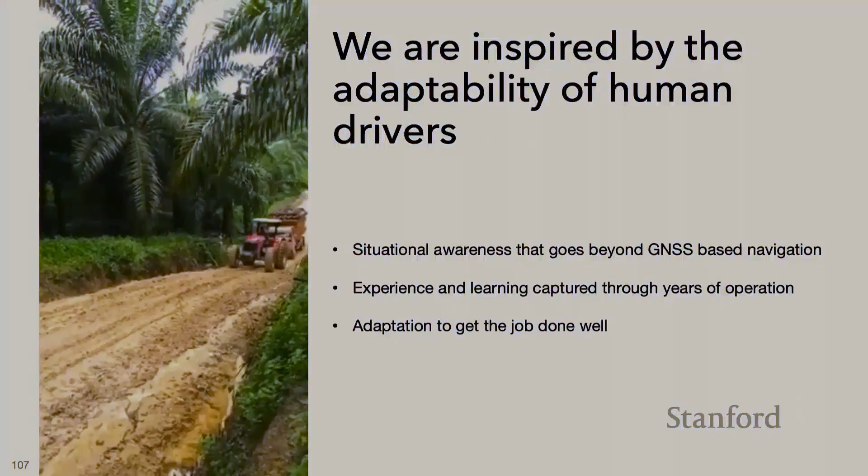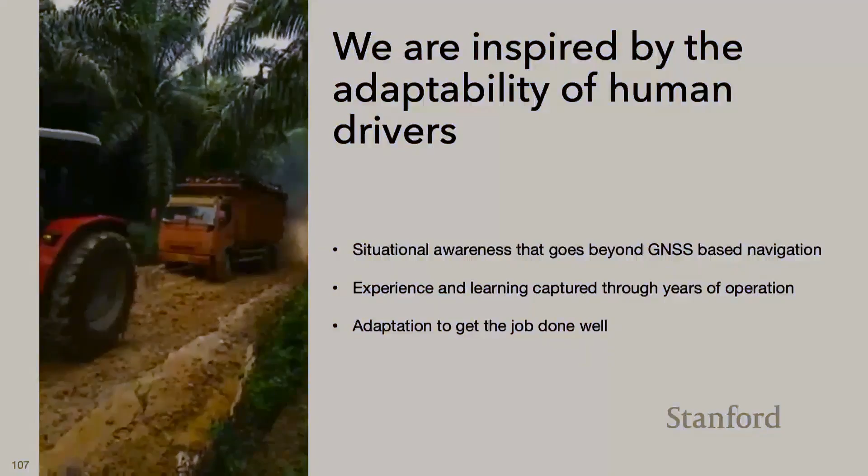So the other thing I'll talk about now is some of our work in broader field robotics and just algorithms for driving robots, and this method called WayFAST. So you see here this tractor driver just using their eyes is basically pulling this very, very heavy truck on this completely muddy terrain, right? So if you try to do that with just using GPS or something, it's just not going to work. You have to have experience built in and learning in real-time adaptation to deal with that.

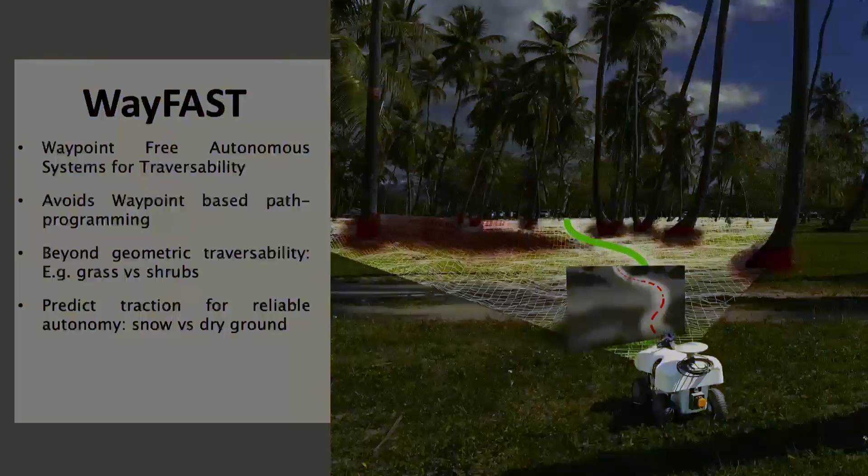So we've been thinking about how to encode that in software. And one way of doing that is what we call WayFAST, which is waypoint-free autonomous systems for traversability, right? So basically, you give only a single waypoint where the robot has to go, and the robot gets data from its sensors, essentially stereo cameras, and creates a traversability and traction map just based off of that data, just like a human would do.

So this is a fully self-supervised method that basically takes in an image and creates a traction map, which then becomes a cost function for a controller that then generates a path for the robot. So the way we do this is we start with a standard robot model, and that's really cool because we can easily swap this model whenever the robot changes. So the system is pretty scalable. And we add to it these traction parameters that we talked about before.

We estimate these traction parameters in real time, and then that becomes the labels for the images that the robot creates. So in the training time, the robot's driving around, it's estimating the traction as it's driving around, and that data is correlated back with images. Those images are then used in exploration stage for training. So here, for example, you can see as it's going around, the robot is driven and it hits different things, and the traction that it experiences is encoded by itself.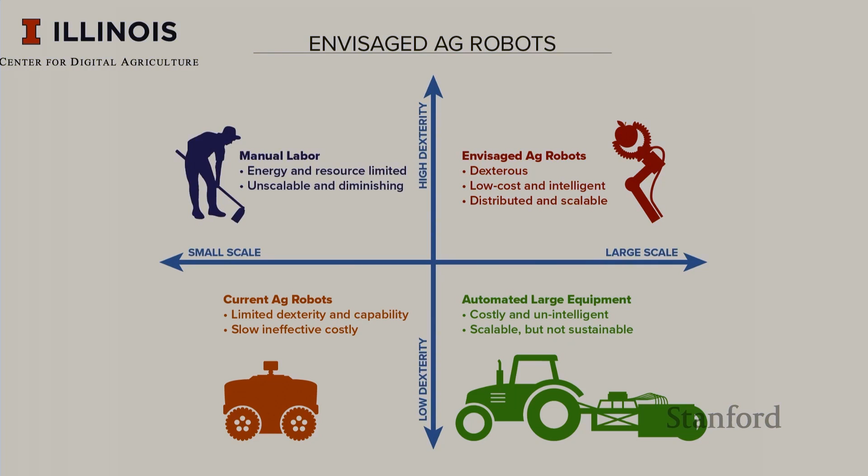So the goal is to try and create robots that can have high level of dexterity as well as scale up well. So towards that, we've been thinking about how to create different types of robots. So I've been working with a friend of mine, Girish Krishnan, who's a professor at UIUC, as well as Mattia Gazzola and Sarah, who is the expert in polycultures, to create new robotic concepts that would work well in a cluttered setting like a polyculture, in which different varieties of plants are planted together so that they can grow together.

And so these arms are essentially, they're called FREEs. They're basically tubes wrapped around with a filament, and each of them is wrapped in a different way so that when you pressurize it, they bend in a particular way. So by controlling the pressure and the wrappings on the different types of tubes, you can create muscle-like structure and bend these things any which way.

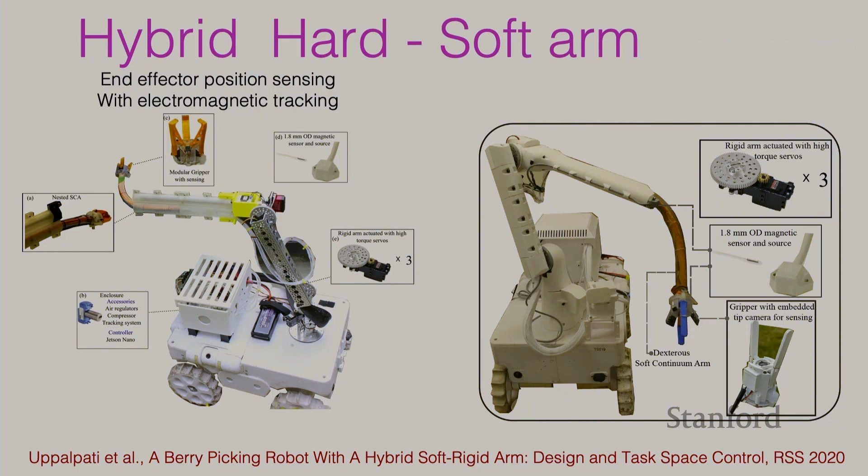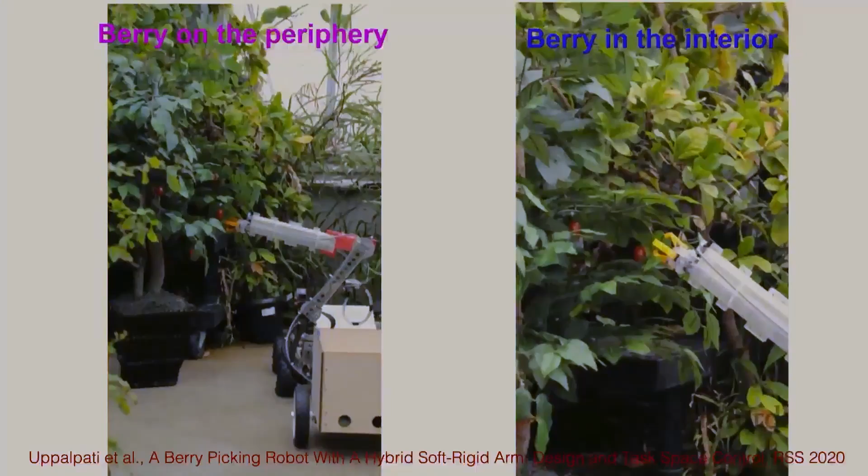In 2020, we had a paper at RSS in which we basically combined the FREE arm with a rigid arm to create a hybrid manipulator. So the idea was that if the berry, or if the target is not within the reach of the rigid arm, then you move the soft arm out and bend it in any which way to get it. And the reason to do that is because the rigid arm is really much faster. You can move it really fast, but it doesn't have the dexterity. But the soft arm can reach all these different places, but it doesn't have the speed. So can we combine it together?

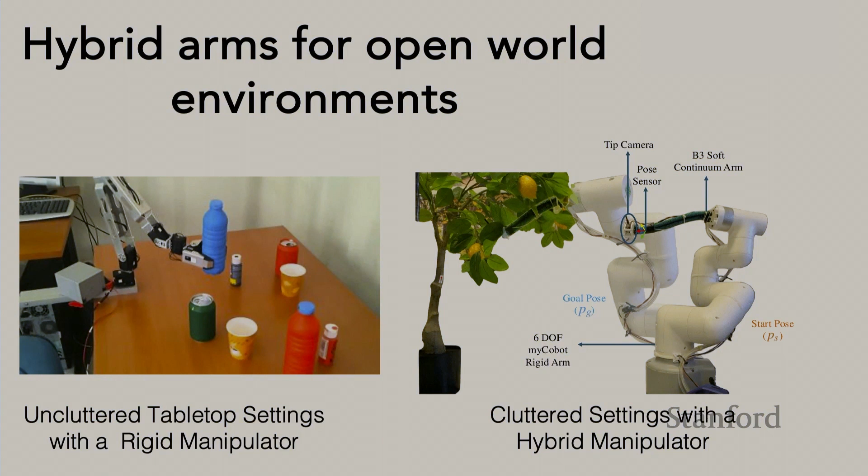And I'll just show you some results that aren't yet published, but hopefully soon will be, about trying to get these hybrid manipulators to work in an intelligent way. So you must have seen a lot of this type of work with rigid manipulators, where robots are detecting objects, creating 3D representations, and picking things up. And there's a lot of very interesting things in which these are also connected with large language models. We want to do the similar thing, but with these hybrid arms.

So the way the pipeline works is you get an RGB image. We create a 3D reconstruction using a network called MASt3R. Then there's a standard image segmentation network that can help find objects. This then creates an occupancy grid, a mental map of where everything is. Then you make a path, and in planning the path, you use a model of the soft arm, and then this goes through another network and creates the actuation.

And the idea is that by creating paths that are separate for the rigid and the soft part, you can make sure that the rigid arm is not bumping into or touching anything, but the soft arm doesn't have that constraint anymore. You can touch and you can coil around things. So again, this work is still going on, but here are some examples of what we're seeing. There's one single camera at the end of the manipulator in the soft arm, and we're using that to create these 3D reconstructions. And then I guess I'll just show you the video.

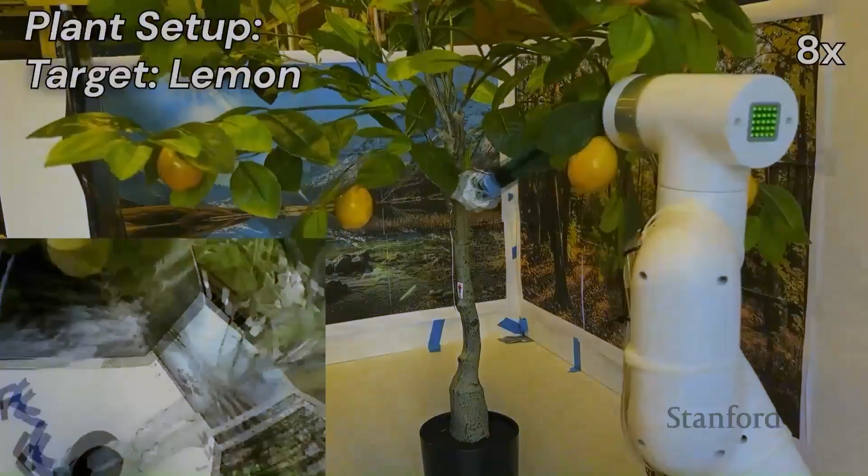So in this case, the end effector has to reach this bottle, and the data that's coming is from this eye-in-hand camera that's here, and you see that it's able to get to it. In this case, it has to reach this lemon, and you see that it'll basically go around, but it'll move the plant knowing that the soft part can touch and interact with the plant, but the hard part kind of stays away from this.

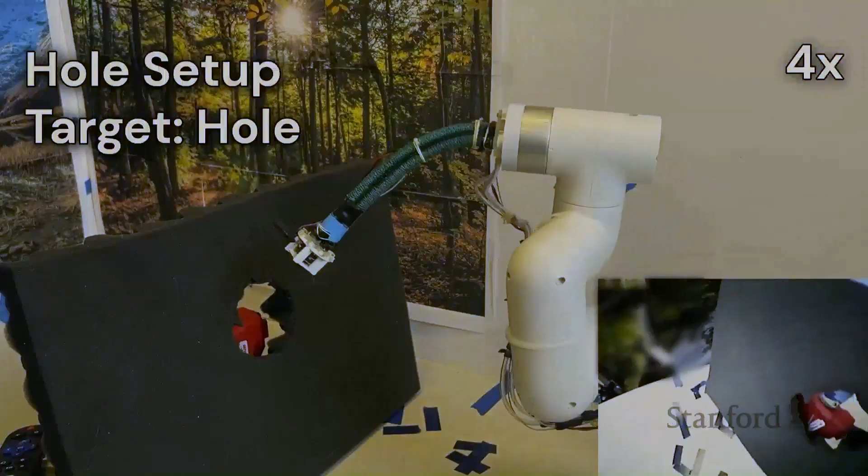And then in this case, it's going to reach the hole, again using the same kind of technique. I guess the next time we show this video, the robot will have gone through the hole to do manipulation on the other side.

Okay, so I'll end this here with a view to the future of one other application that we're trying to apply the Terra philosophy to, and that's solar plant operations and maintenance. So, California is actually the largest solar state also, right? California has one of the largest solar farms, which is in Mojave, which is not that far from here.

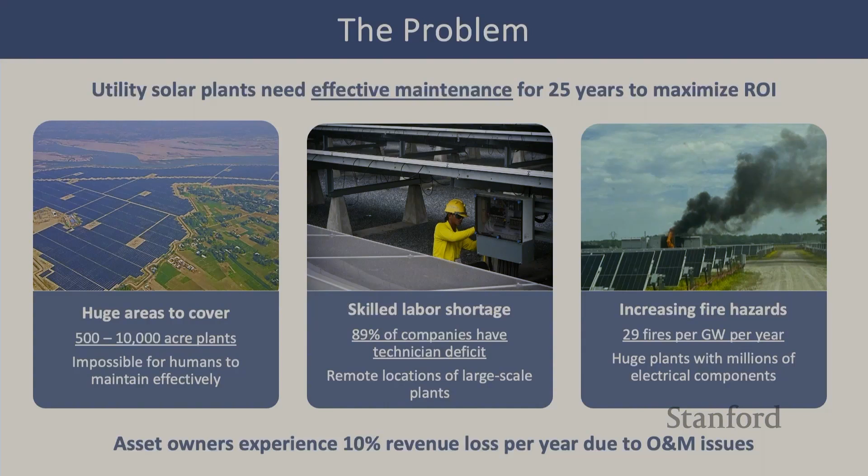And these are very large farms, right? There's like 10,000 acres under cover. And they have a payoff period of about 10 to 12 years, right? But the problem is that due to issues in manufacturing, due to grass that grows, due to micro cracks and things, solar panels and the surrounding stuff can actually catch on fire. And that creates a huge hazard. And there's a number of other maintenance operations that need to happen.

So one of the things that we're thinking about now is how can we use robots to go out there and use the same kind of technology that we have for under-canopy navigation to get near the panels and do things like repair and maintenance. So, this is just a quick demo of this thing. We're calling this thing TerraWise.

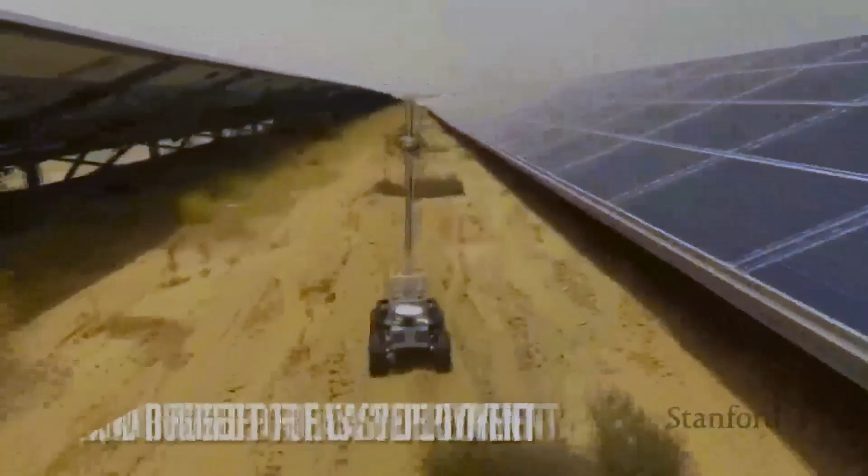Again, it's a very simple robot. This is a prototype that goes through this panel. When it was driving, it was 50 degrees centigrade outside, right? So pretty hot. And then it has cameras on it that can help it find things like combiner boxes, MC4 connectors, things like that. So it's pretty interesting. It's early days for this technology, but interesting to see how it evolves as these robots become more practical.

Okay, so I want to kind of end it here. One of the things that's really fun about the work that we do is it brings together a whole variety of people across the campus at UIUC, right? From the engineering quad to the agriculture quad to socioeconomic people and extension, which is how the university engages with farmers.

And then people often complain that what I really wanted is robots that would do my laundry, but what I have is a large language model that will write me poetry, right? So, both things are useful.